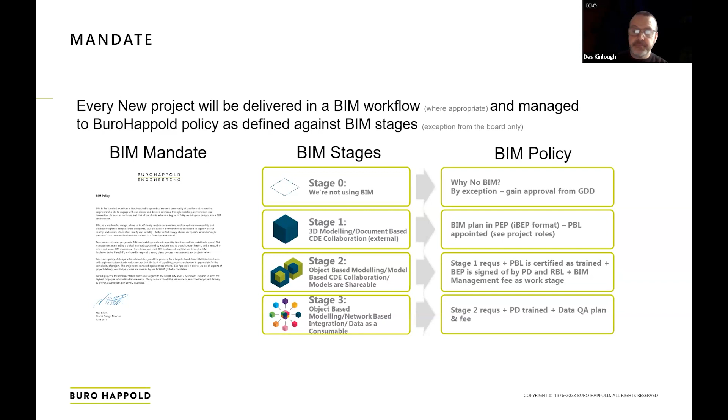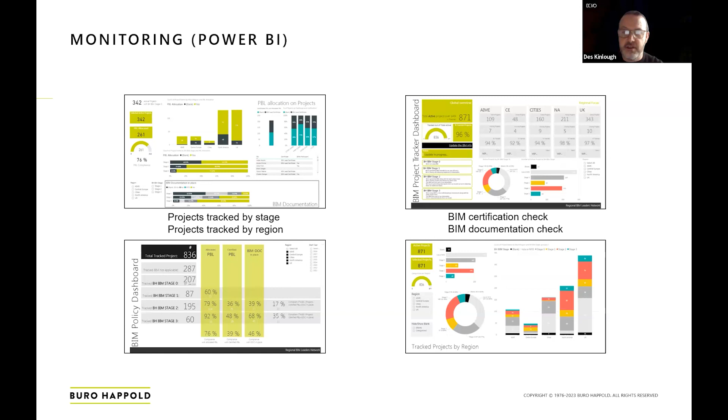So like any adoption, you need to monitor progress. So we created Power BI monitoring, which we've made into a more formalized dashboard now. But it was a really good way to understand that your policies were being adopted and making sure that the use of data - we were able to track where we were on our journey. So we tracked what stages I just explained, how many - we obviously wanted to move up to the higher levels. We also checked documentation adoption in the region, and certification training, which I'll go to in a few slides.

Obviously, people and creating a network was one of the main things that we adopted straight away. We had a global head of BIM, and then a regional lead, as our company is split into regions. I lead the UK side, but there was my equivalent in different regions, and specialisms like a specialist consulting team and our infrastructure team had a lead too. In high volume regions like the UK, where probably 50% of our staff are based, we also had office and discipline leads to really drive adoption. That is really key to making it work.

The regional BIM leads would have to have implementation plans put together for how adoption would be driven in their specific regions, since different regions have different skill sets, different needs, and different clients. That was a requirement for each lead, and it was monitored.

There were 4 pillars that we looked at for our adoption: people - you need to invest in people; processes - making sure the right processes are in place to ensure the technology can be used; the policies that underpin it all; and the technology. There's a list of subcategories in each one, and I'll go through some of these over the next few slides.

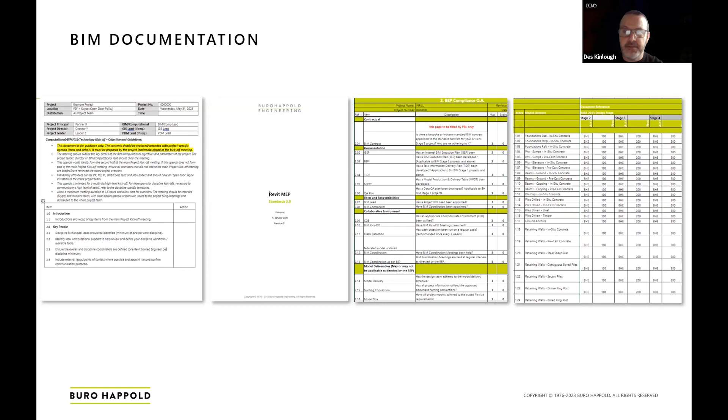Policies are probably the most boring part of the whole process, but they're quite important - they underpin everything. Having the right policies ensures consistency across your practice. I've shown some examples here, 4 on the screen: looking left to right, a kickoff agenda, a standards document, a QA document, and our level of development, level of information document. There are standards, some of which are also used.

So we had our policies created. Obviously, investing in people and training is important. We've built up a lot of training over the years, but our core training, from left to right, starts with Whiteflow, an online software we purchased that gives the basics for Revit skills. That's increased recently because more people come in with Revit skills already, but at the start of our journey and still now, there's people that need that training. It gives them a base level, and it's easy to roll out because it's done centrally - I'll get to how we assess these people. That was mainly for senior engineers and below, and open to people above if they feel they need it.

Then we realized we needed more specific Buro Happold company training. It had many names - one was called BIM Bootcamp, which progressed into the BIM for Engineering series. More recently, in the past 5 years, we've started doing academies and looking into visual programming, with the base being good BIM skills to allow you to use the data for computational engineering. Finally, there's BIM 101, which is more related to our senior management, looking at the commercial side, scopes, standards, and the change in philosophy of a project done this way, and workflows, so they can really understand and lead the projects properly - a really important part of it.

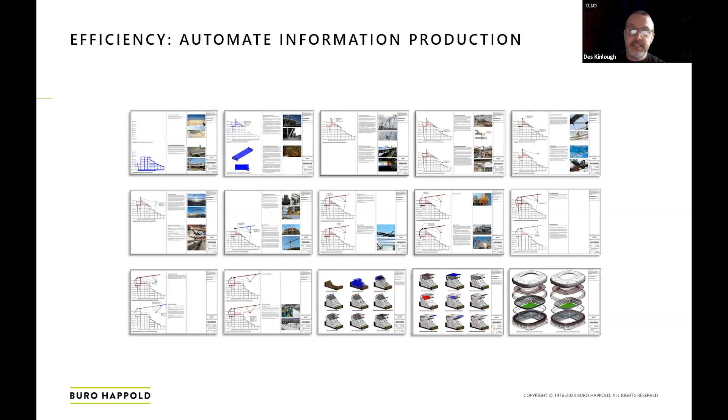We invested in software such as Kinship - we know Gary quite well - for our content management and analytics. We looked at some add-in tools in the industry, like RF Tools and RTV Exporter Pro. We built our own tool called Adroit where we found gaps in the market, and then started to look at automations using visual programming in Revit and Navis, using Dynamo and Grasshopper. Our adoption and making sure that data is managed was through Power BI, and as Gary explained, we use a lot of these tools for analytics. It really helped us manage major projects, major models, and understand our workflows in our projects.

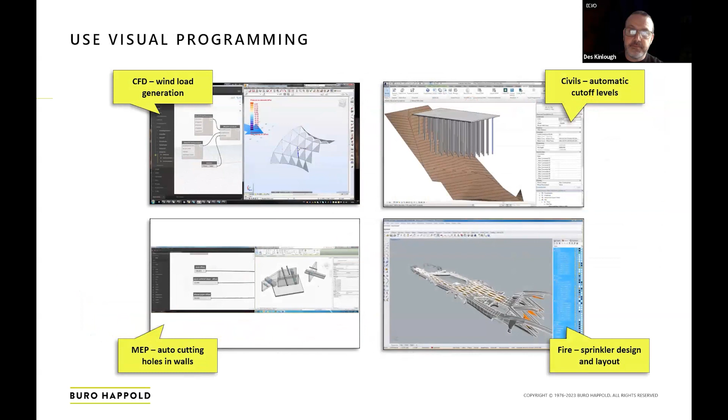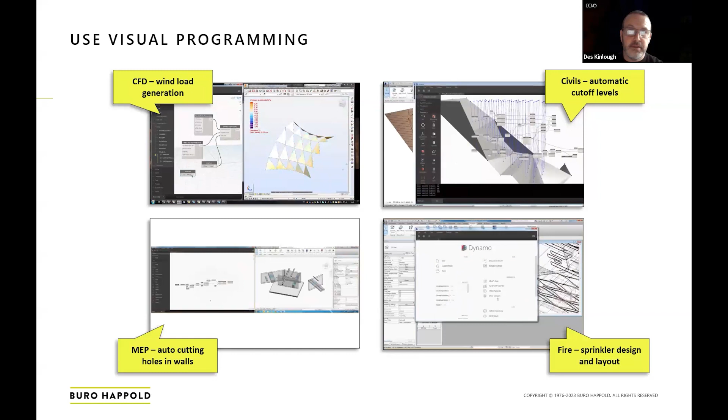Visual programming has become a key skill that we require from our teams, and we've invested heavily in this area. We treat it much like Excel and putting formulas in Excel. If we see efficiencies that are bespoke to projects, we enable our workforce to have those skills and create them. We also have a central team that creates some scripting, but we also want that as a skill base for all our staff.

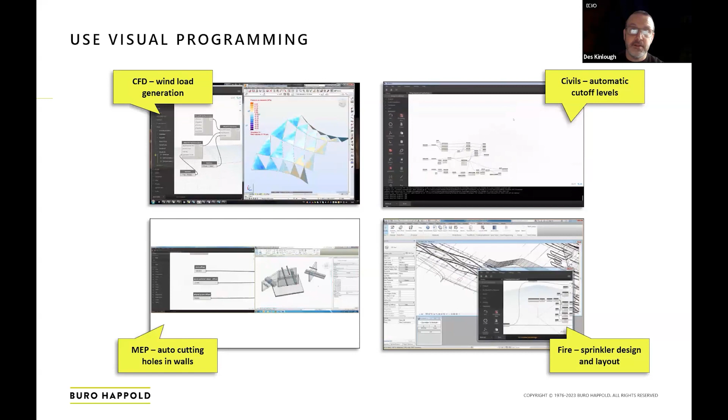So again, going on better integration, we work a lot with calculation packages, being an engineering company. We had to invest in tools, and we had to invest in processes.

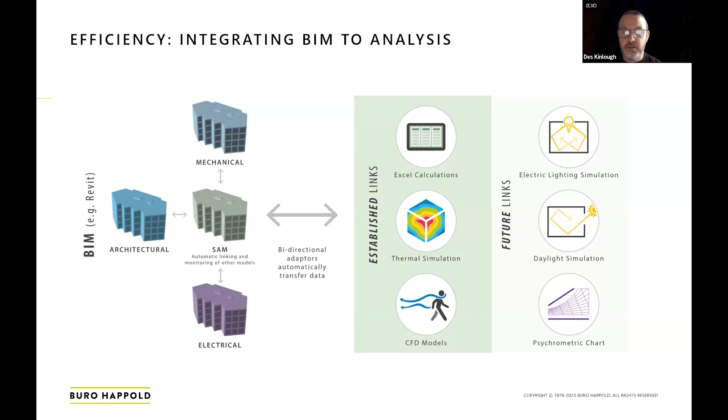This is an example of how our sustainability team looks at analysis for overheating. They would normally build two separate models. So we looked at this process of a single analysis model, where we could bi-directionally push data between the analysis and our BIM model, also create the actual geometry in the BIM model and push it to the analysis model. We've invested in that, and we can see a real workflow improvement between both these pieces of software.

Probably about 8 years ago, there was a big problem that we've all seen and that's been highlighted in a lot of presentations I've listened to over the past 2 days: the biggest problem is the interoperability between tools and no common schema. So we tried to bridge that gap by building our own code schema, looking at the challenge of how we work today in a collaborative environment. It's open code, open and accessible, and that's really been the basis of how we've built our tools going forward and shared it with the industry. There have been some good examples of people utilizing our code.

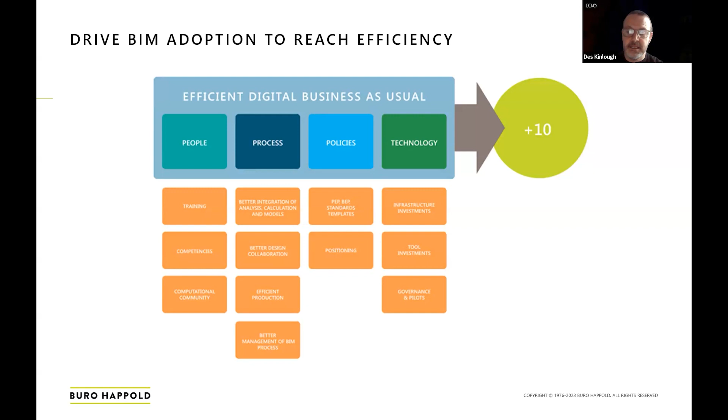So that's a quick whistle-stop tour through how we've got to our adoption, and to being BIM as usual. It's allowed us now to really get the key benefits. It's something that has to be managed still, you know, it doesn't just look after itself because it's business as usual. It still has a kind of maintenance, but that investment has really borne fruit over the past 10 years.

So I suppose the challenge we look at is how do we make BIM business as usual with our clients, and how they can leverage that side of things. Again, it's something that's probably been repeated over the past couple of days, but better decisions arise from better information, and better information arises from better information management. So having the correct data inside is something that the industry is looking at, and we're looking at more.

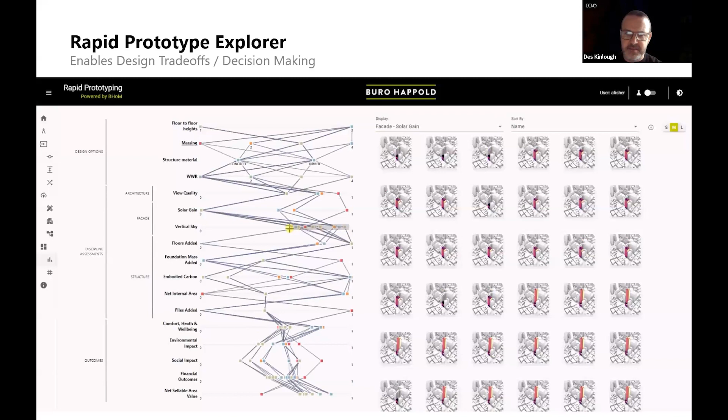This enables us to do optioneering - one of our BIM tools that we've created. Looking at all key decisions, whether commercial or engineering, we can start to optioneer through different types of scenarios. Again, that's using good data inside it, a mix of our computational tools and BIM skills to come up with these scenarios. This investment has allowed us to bear fruit on these types of tools.

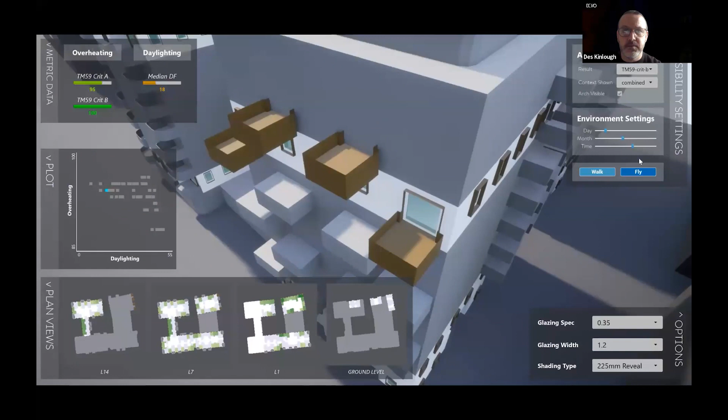Similarly, our sustainability team have looked at how they can assess overheating and daylighting, especially in residential projects for our clients, and what is the best scenario, the best tool, or best option that we can use, so that we can drive decisions earlier to a higher level of detail - so that clients can make informed decisions earlier rather than facing a costly mistake later on in the design process.

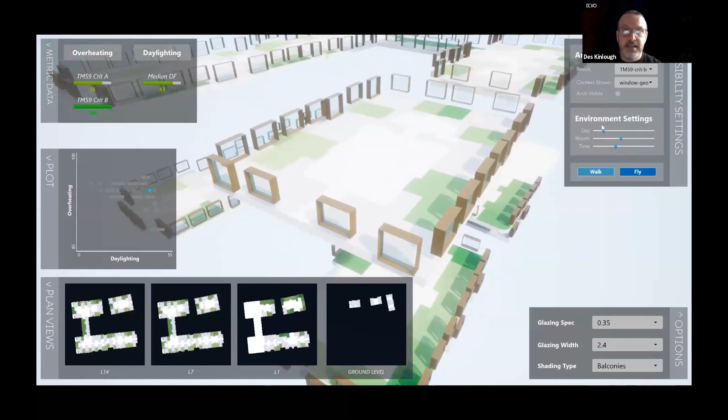So just to finish off, as I mentioned, form follows data. There's been a lot of talk, and it's been quite inspiring listening over the past 2 days to some of the presentations. I think as a community we're all in agreement, and I think the hardest part is actually us all having a common approach and agreeing on it. But we need to rethink our approach to use of data to innovate and reshape the project space and transform our industry, because BIM is the digital medium for all this.

It's quite easy looking at different organizations and how they've changed their workflow - you know, Netflix has taken over from DVD, Spotify has taken over from the CD. Our industry really needs to take a look at how we are going to change going forward in this space. Okay, I think that's it from me.